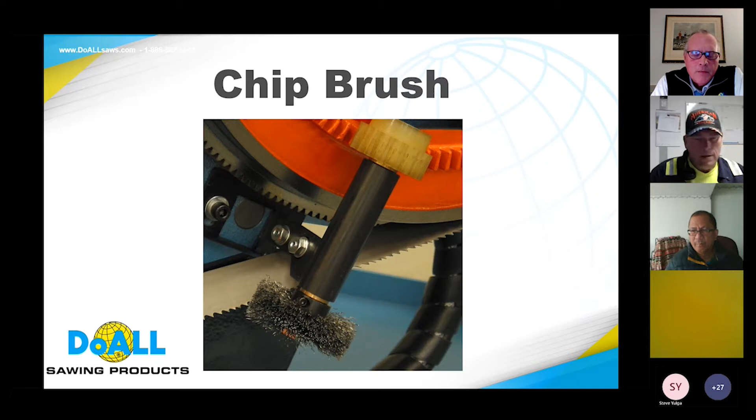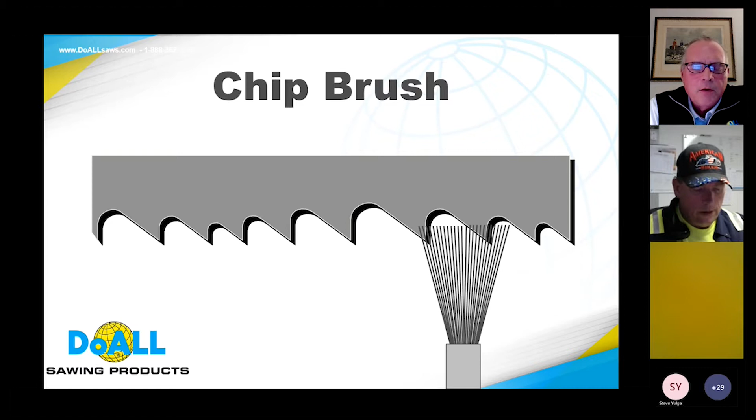The first item today we're going to talk about is the chip brush, one of the least expensive wear parts and also one of the most overlooked wear parts on a bandsaw machine, and it's very important in extending your blade life. The bristles of the wire brush clean out the gullets between the tooth tips. There are times when the blade travels through the material being cut and saw chips are left in the gullet, and you do not want those saw chips to travel back around and re-enter the cut. When that happens, the gullet can overfill, applying too much pressure, and something has to give - that is almost always your teeth stripping. So there's a correct way to position the chip brush: you want the bristles just barely touching the shallowest gullet. You don't want to jam the chip brush all the way into the blade, because essentially all you'll be doing is cutting the wire bristles of the brush. So again, a very important wear part, very important to extending your blade life.

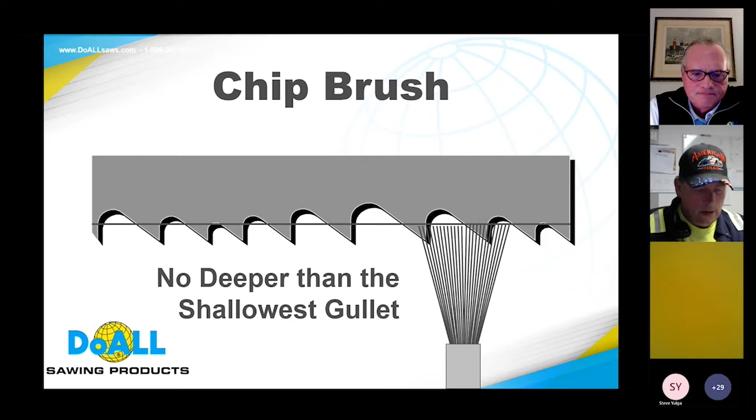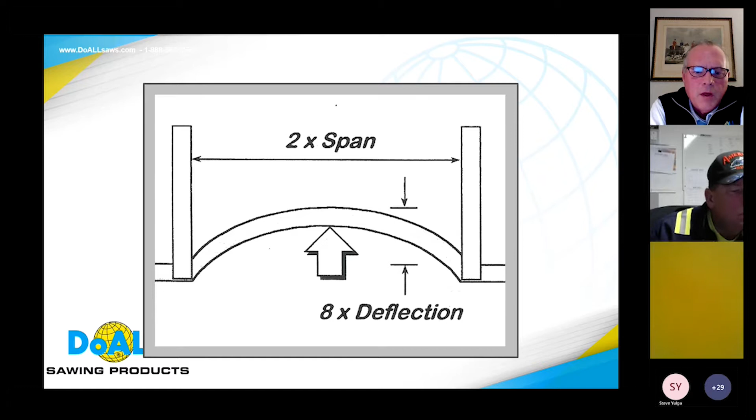So what is wrong with this picture right here? Well, the left saw guide arm is too far away from the material you're cutting. Your right saw guide arm is in the correct position. You want the left side saw guide arm as close to the material as possible, because when you don't position both of them correctly, your saw blade will actually deflect or bow upward. And when that happens, it causes stress cracks in the backing of the blade, extra fatigue, and then your blade will eventually break prematurely. This slide is obviously an exaggeration a little bit, but the numbers are correct: for every 2 times the span of the saw guide arm is too far from your material, the backing of your blade will actually deflect 8 times. So that is a great difference - great deflection - and as I said, when that happens you will develop cracks in the backing of the blade, and your blade will break prematurely. And as we all know, saw blades are not cheap.

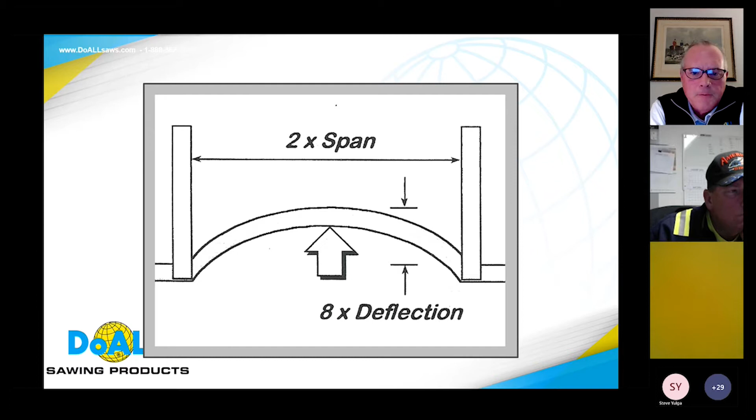We're going to talk a little bit about band tension. Every one of your saws, you put the new blade on and tension it, but most guys don't understand why they're tensioning the blade. Basically, different saw manufacturers have different specifications, but we're stretching that blade to eliminate deflection. When you get deflection, you start wearing the set on the teeth, and once the tooth set is gone, it'll start cutting crooked. So for band tension, if you don't have a tension gauge, you either have a service tech come in and check the blade tension, but it needs to be set to the manufacturer's specs of the saw, and they do vary among different manufacturers.

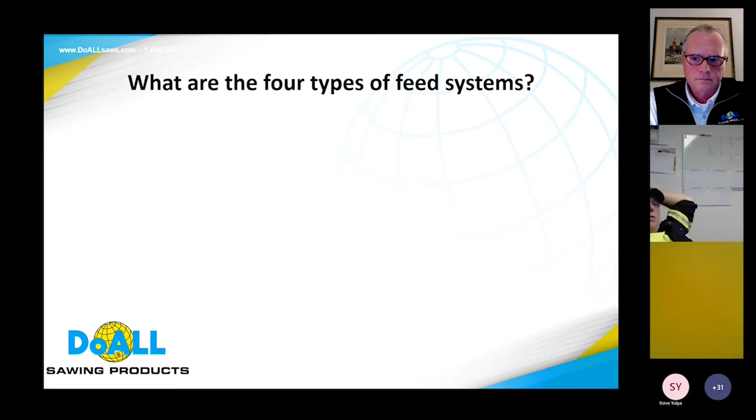Next thing we're going to talk about is the feed system. Feed system is how the saw is feeding through the material, and there are 4 types in general. The first one, found on your lower end saws, is what we call a closed loop hydraulic cylinder. Basically, all that's doing is bleeding oil from one side of the cylinder to the other, allowing the head to come down. It's controlled mostly with a flow valve.

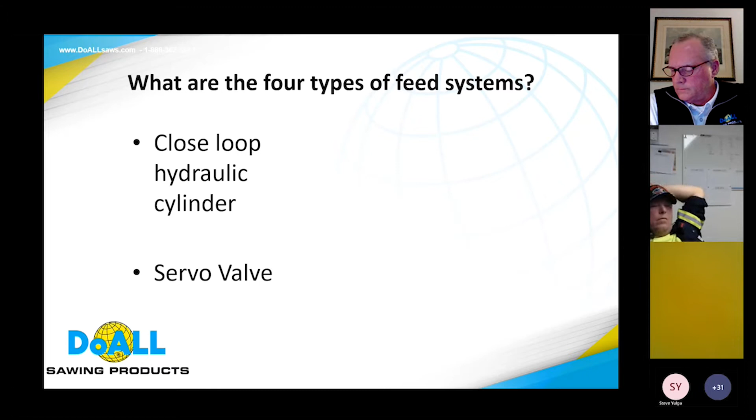The next type of feed system out there is a servo valve system. Servo valve systems are kind of getting outdated, but the back of the blade ran against the backup, which was connected to a valve. So when you were putting excess feed pressure on the blade at the tooth, it would slow the feed rate down. It's a very high maintenance item, and most saw manufacturers went away from this system.

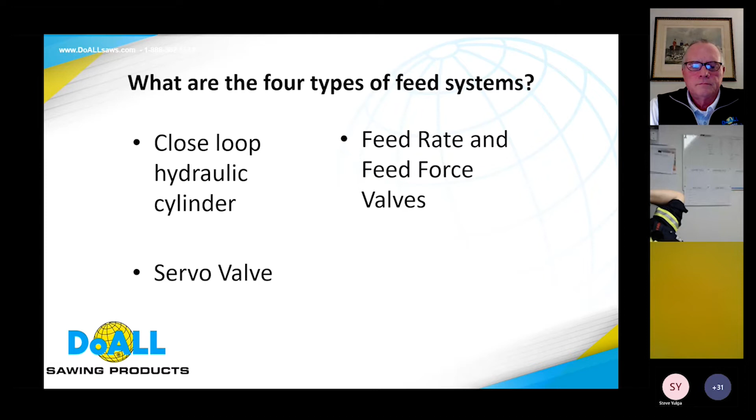Your next system, which is very common in your power saws, is feed rate and feed force valves. Basically, you're controlling your feed rate, and also the force, which is how much pressure you put on the tooth. You need to know which system you actually have so you're able to adjust them correctly to give you better blade life. Another name for that is a balancing valve.

The next type of system, more used in the newer, more advanced machines today, especially ball screw type saws—there are different modifications of this, but this is what we call a meter feed system. This is the feed system of the future. You will find this mostly on the higher end saws.

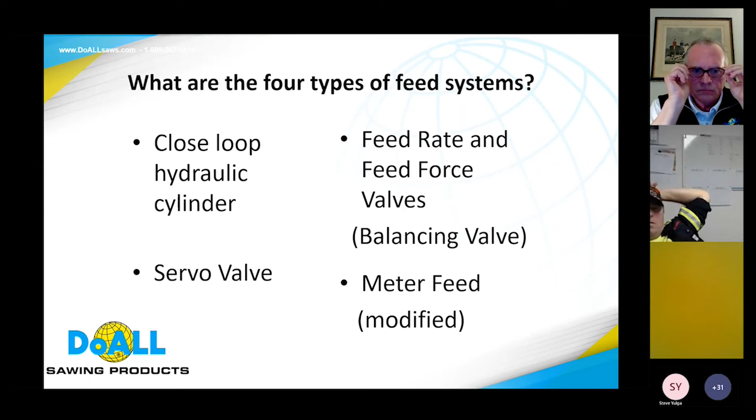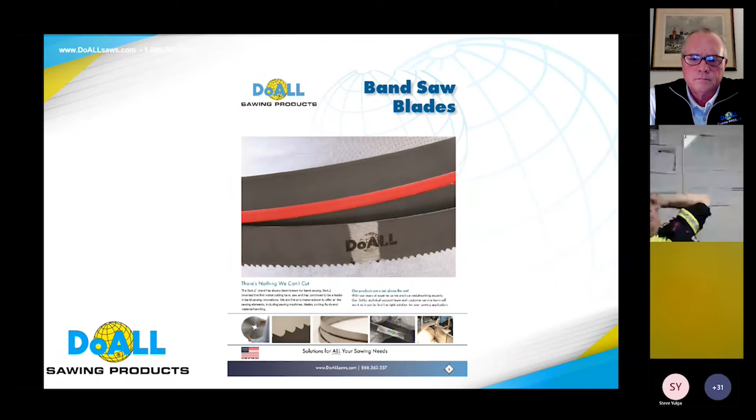So next thing is the blade sales catalog. Basically, this catalog has lots of information in it, and it would really be beneficial for you to have this catalog. If you don't have one, ask your sales rep to get you one, or they're available online at www.doallsaws.com. This has a lot of technical information—we spend a lot of time in the technical part of writing this catalog. So if you don't have one, I strongly suggest you get one.

Okay, here's one other important thing: breaking in your blade. What does breaking in the blade mean? Does it mean taking it and throwing it across the floor? Is that how you break it in? I see a lot of guys do that, but that's not what we're talking about. The main thing about breaking it in is it hones and strengthens the edge, and it will extend your tool life 25 to 50%. We have done testing on this time and again, and every time we break in a blade, you get much better blade life out of it.

You ask me, how do you break a blade in? Well, number one, you do not change the band speed—you leave the band speed alone. This is where a lot of guys make a mistake. If you change the band speed, you are still putting a heavy tooth load on that tooth. The next thing we want to do is reduce the cutting rate to half of the rate. So say you're calculating you want to cut at 10 square inches a minute—you now want to be breaking in at 5 square inches a minute, and you do that for 20 minutes. So take and cut half of your rate of what you were doing, and do this for 20 minutes.

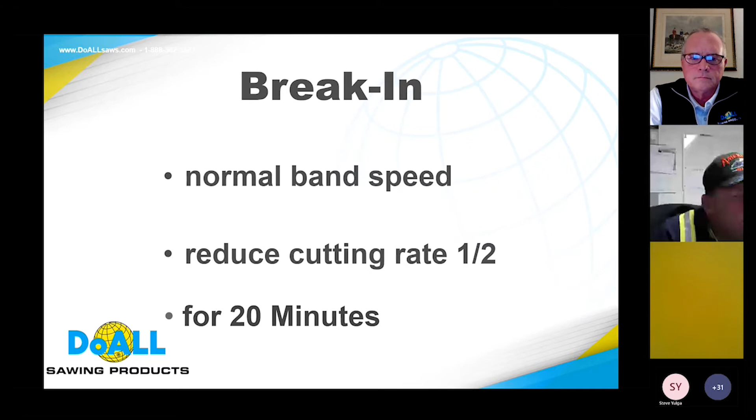Breaking blades in, we do differently for carbide. I'm talking about bimetal blades versus carbide blades—breaking in a carbide blade is done differently. The big difference with carbide blade is you now do decrease the blade speed, down to 70% of its value. So on bimetal, we did not decrease blade speed, but on carbide, you do, and you bring them up uniformly.

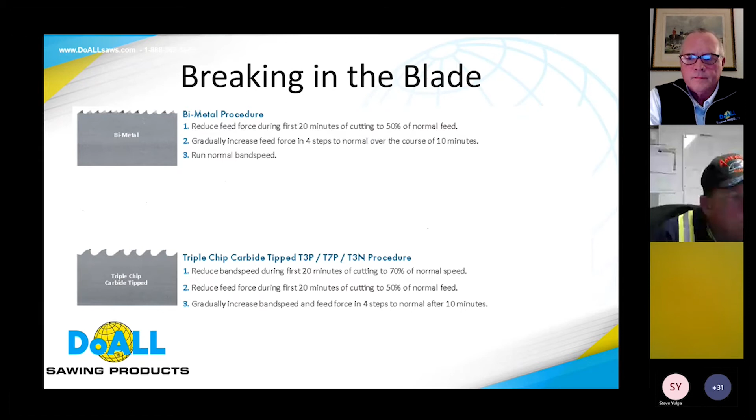So the easiest way to explain this is think of a lead pencil. If I took a lead pencil and sharpened it with a good point on it, and I go to write and push too hard, the point breaks. What do I do different? I don't push as hard—I hone that lead pencil in, and then I can start pushing and writing without breaking the tooth on it. Take it away, Art.

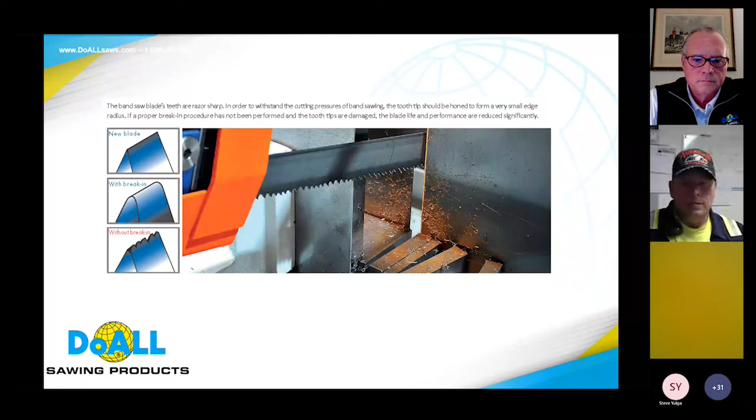Thanks, Dale. Appreciate that. So another very important technique of extending your blade life is making sure you select the correct tooth pitch per the material you're cutting. So how do you do that?

Well, as Dale explained, our catalog has a wealth of information, and one chart in the back of our blade guide helps you select the correct tooth pitch. So for this example, if you're cutting a 6-inch round piece of material, look straight across the row up top until you get to 6 inches. Then look straight down the column. You can see there that your primary number one blade tooth pitch choice is 2-3, meaning 2 to 3 teeth per inch.

But if you have a 3-4 pitch, that's also fine. That is our secondary choice. So primary choice for a 6-inch round is 2-3, your secondary choice is a 3-4. Both of them would work fine. Make sure you select the correct tooth pitch.

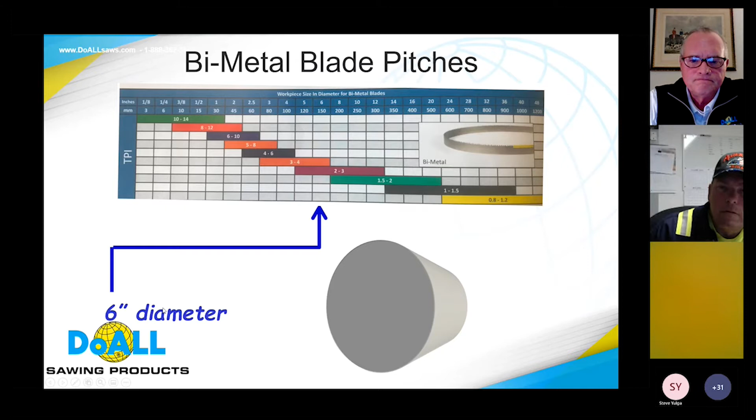All right, so you always want to make sure that you have a minimum of 3 teeth engaged and a maximum of 25 teeth engaged in the material. Why is that? Well, you need a minimum of 3 teeth engaged because your saw head is a lot of weight, and if you only have 1 or 2 teeth engaged with the weight of the saw head coming down, you're going to snap the teeth, you're going to break the teeth off. So have a minimum of 3 teeth.

And why do we say a maximum of 25? Well, if you have too many teeth going through the material you're cutting, your gullets will overfill. And when your gullets overfill, there's a lot of pressure. What's going to happen? With that pressure, something's going to have to give, and you'll start stripping the teeth.

So when you're cutting thinner sections or thin metal, you want to choose a finer tooth pitch, more teeth per inch. When you're cutting thicker sections or thick metal, you want to choose coarser pitches, or less teeth per inch. Very important in extending your blade life.

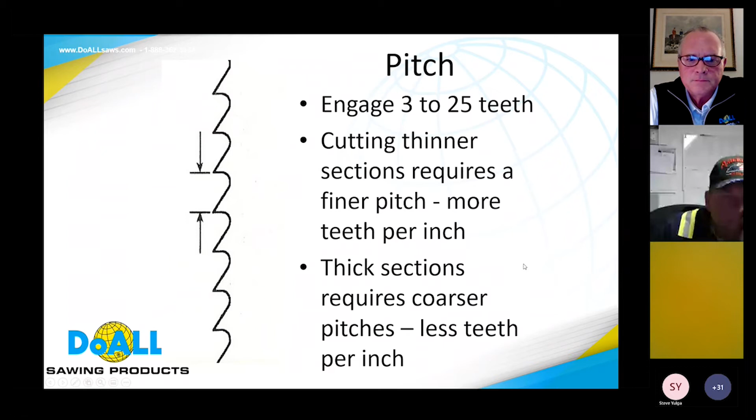So it was real easy choosing the tooth pitch for a 6-inch round solid. It was basically one step involved. What about if you're cutting structural type of material like your channel, your angle, I-beam, or tubing? Well, it's still very easy.

It's a 2-step process. First, you want to determine how wide your structural material is, represented in this example by letter B. Then you want to determine the thickness of the leg of the angle, or the wall thickness of the tubing, represented by letter S. Once you determine letter B, you look across the chart to find how wide it is, then go down the column of letter S, and connect the dots between the column and the row, and that will tell you exactly what tooth pitch you should choose for that type of structural material.

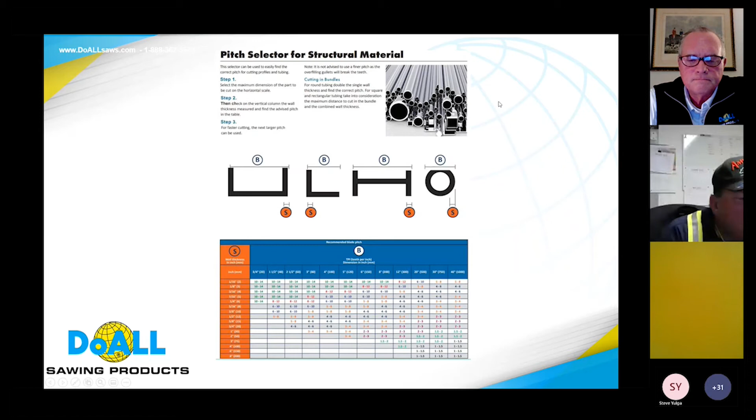Okay, go ahead and advance it. Thank you there, Art. We're going to look right now at figuring out cutting rates. A lot of customers or operators run their saw by what someone told them, but there is some math that has to be done, and we need to know this.

So basically, you will find sawing recommendations. We have charts. Somebody may have the old slide rule that's still available. You can find it on our app that gives you cutting rates. There's many different ways of finding them. But you need to know basically, one, what your band speed should be, and two, how many inches per minute we're going to be cutting, getting our cut rate off the chart.

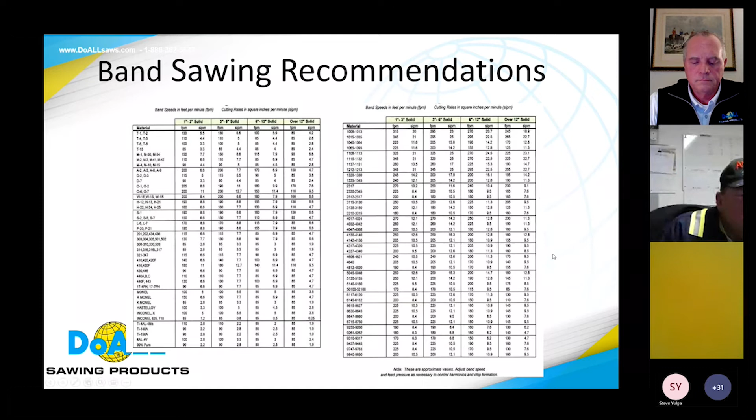So here's the formula. What we're trying to do is find time. It's A-R-T: Area equals Rate times Time. We know the cutting area, that's the material, whatever we're using—a round, a rectangular, or a square. We can figure the square inches of our material. The cut rate we get off the chart, that gives us our cut rate.

And then cut time is how long it takes to cut that piece of material. That's the ultimate goal. If you're not cutting at the proper speed, you're losing production, your cost per cut goes up. If you're cutting too slow, you're sitting there just honing that blade, rubbing that blade, and killing your blade life. So it's important to get a good cut time. Too fast or too slow, both will deteriorate and kill your blade life.

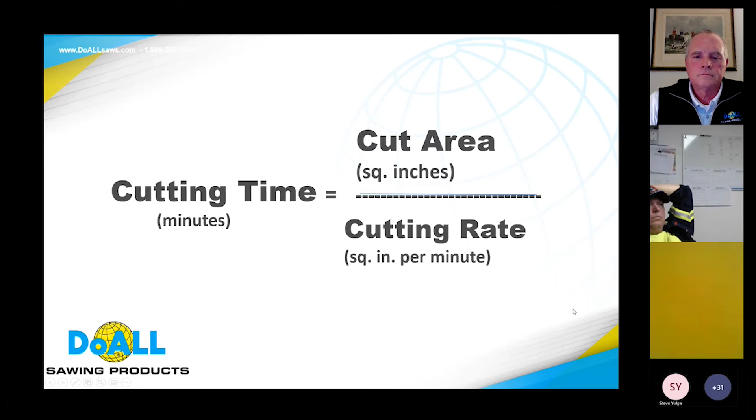So this is the formula, I'm asking you to write it down and start using it. The next thing you need to know is your headfall. A lot of your saws today are working with headfall now.

Basically what they do is they're saying, okay, my head's got to drop 3 inches a minute, or my head's got to drop 2 inches. And there's actually scales on the newer saws of today. So to figure that, here's the formula: you take your material height, divide it by the cut time, which you got from the other formula, and that will give you your head fall. So you can know exactly how fast that head is falling through material. These are two formulas that you really need to know and practice in cutting. We'll gladly work with you to help you get these proper calculations.

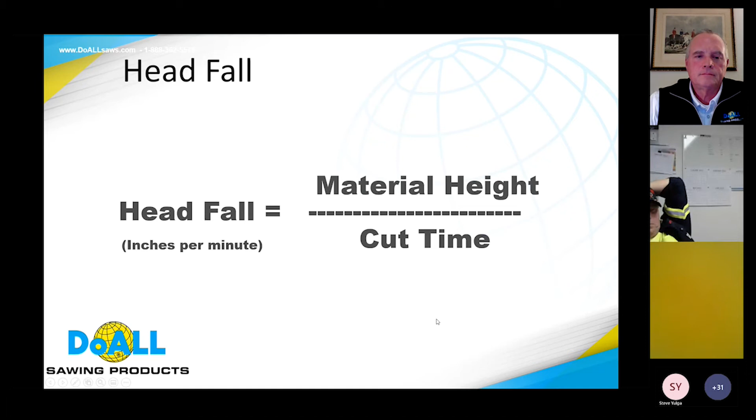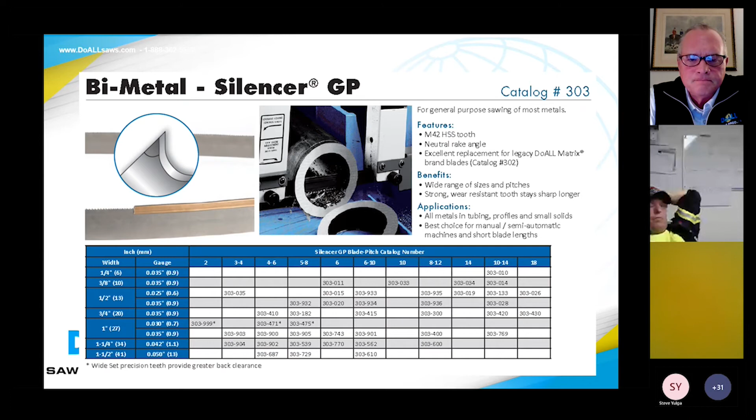So our second blade I want to talk about is our Silencer Plus. Again, it's a good all-purpose blade, used mostly in your solid type of materials. The finest tooth pitch the Silencer Plus comes in is a 6. So if you need a finer tooth pitch, like I just mentioned, you want to go with the Silencer GP. The Silencer Plus is a more aggressive blade, has a positive rake angle, so the angle of the tooth tip is greater. It pulls a bigger chip, and it's a little faster cutting and more aggressive.

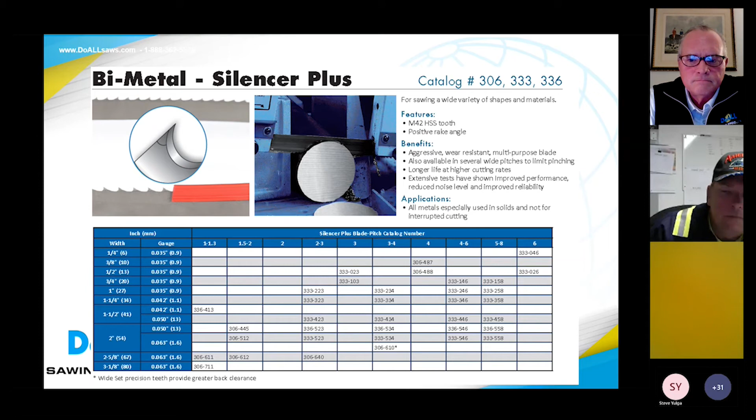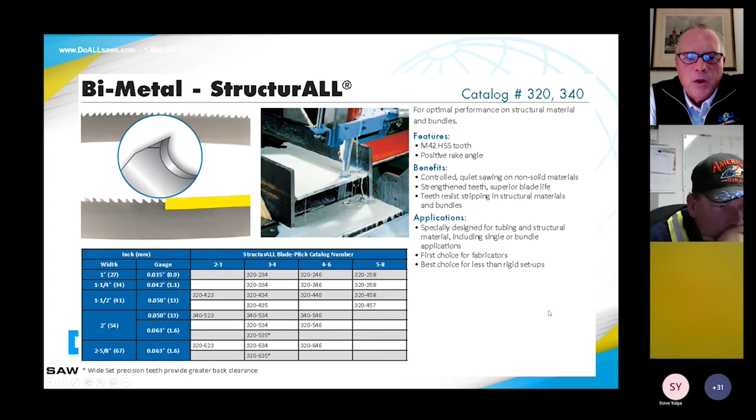The third one, the StructurALL blade, is designed to cut exactly as the name implies - structural type of material. So if you're cutting I-beams, angle, channel, this is your go-to blade for structural material. What makes this one a little different is, as you can see in the circle right under the word metal, we left more metal on the backside of each tooth, which makes each tooth more robust and stronger, preventing tooth breakage. It has a positive rake angle like the Silencer Plus, so it really pulls a good chip. It's more aggressive and a little faster cutting as well. But this is the blade for your structural type of material.

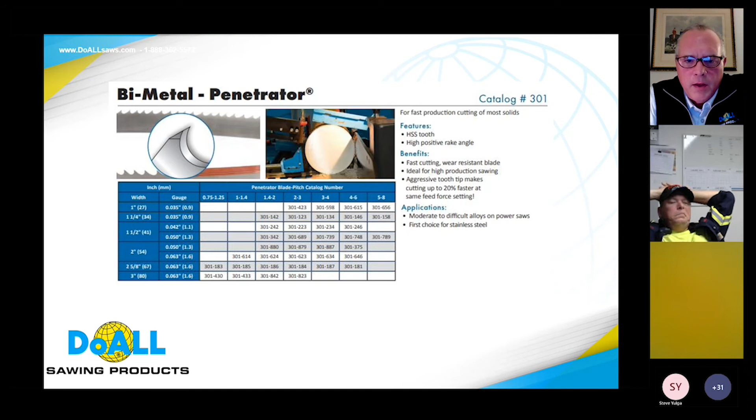And your fourth blade is our Bi-Metal Penetrator blade. This is your number one go-to blade when cutting solid material. It has an even greater rake angle than the Silencer Plus or the Structural. It's very, very fast cutting, pulls a very nice big chip through the material. It does exactly what it says - it penetrates the material, very fast cutting. So these 4 are your most popular bimetal saw blades that we offer. Thanks, Tim.

Okay, so we did a real brief little covering, most we could do in our time limit. We covered a little bit about machines, and a little bit about blades. Now the third element of bandsawing is coolant. Coolant is very, very important. A lot of people think the cooling is to cool the blade during cutting. Yes and no, but in bandsawing we're looking more for lubricity than for cooling properties.

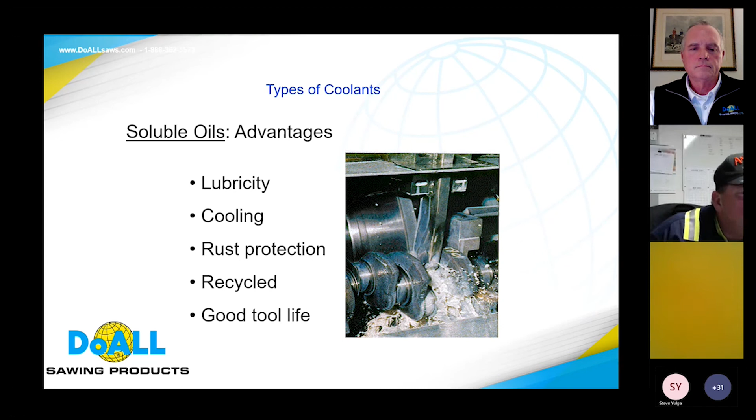So there's four basic types of coolants. We'll start with straight oils, but nobody uses straight oils anymore - most saws can't even pump straight oils. Our next starting coolant is a soluble oil. Soluble oil is a coolant that's mostly oil and water. It gives you some of the best blade life, best finishes. The downfall is it doesn't have a really great sump life. So if you're doing some hard cutting, look at soluble oils.

Your next type is a semi-synthetic. A semi-synthetic is going to have less oil than what is in a soluble oil. This can be anywhere from 5% to 25, even 30% oil. But the nice thing about synthetics is the sump life is a lot more friendly, and the parts are cleaner.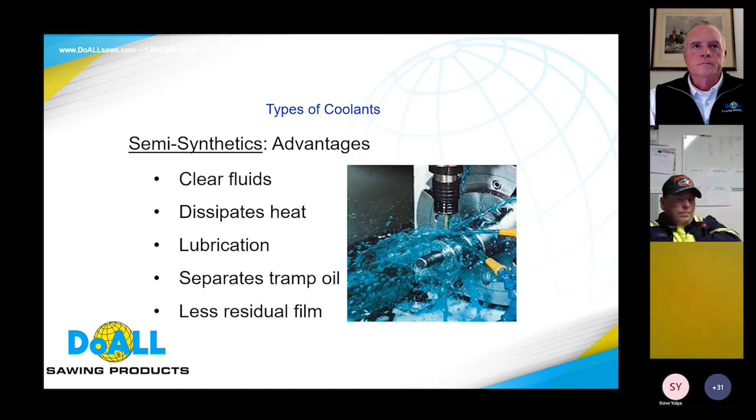This is kind of becoming the preferred type of coolant for most operators.

The next type of coolant out there is your synthetics. A synthetic has no oil in it, and oil creates bacteria that loves to thrive in oils. So your sump life is much stronger, longer lasting in a synthetic. The other big advantage of a synthetic is looking at your next operation down the line. If you're going from cutting to painting, synthetics may be a way to look at because you don't have that oil base to clean up off of the part. So your blade life is not as good as in the other ones, but this is a good alternative.

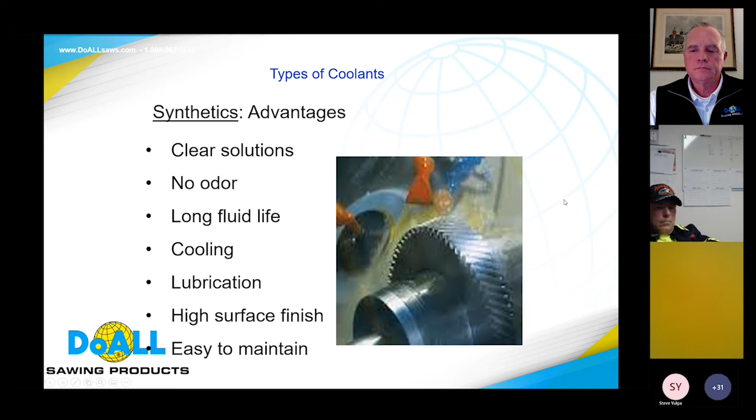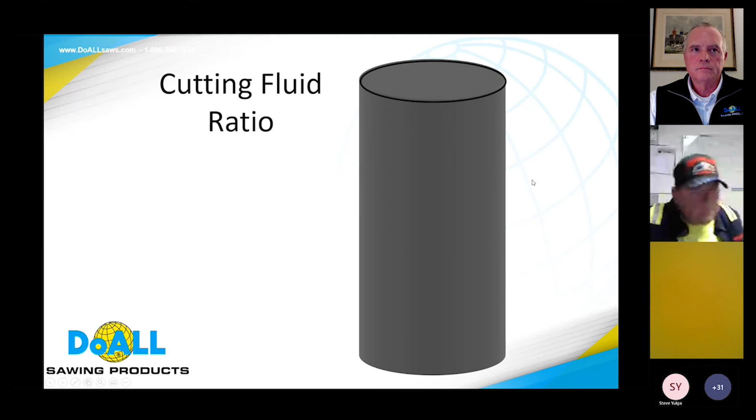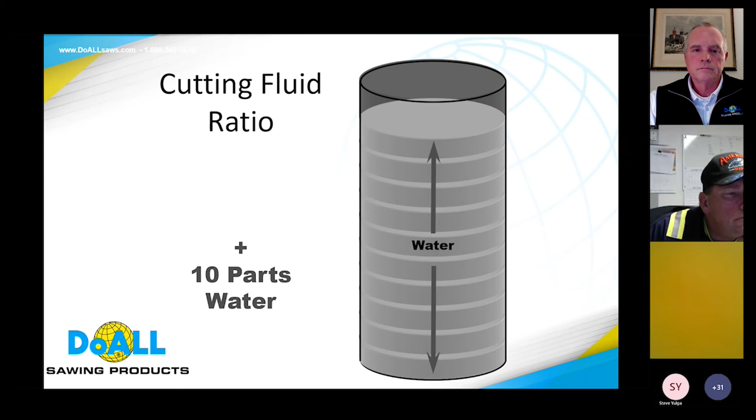So those are your three types of basic coolants used in the market. The biggest thing is we look at how to mix coolants. What's the ratio? Again, we're looking for lubricity properties. In machining, you're mostly looking for cooling properties. So basically, what we do is we take 10 parts of water to 1 part of concentration. That is how you mix. I don't care if it's a soluble, a semi, or a synthetic. They're all mixing the same ratio: 10 parts of water to 1 part of concentration.

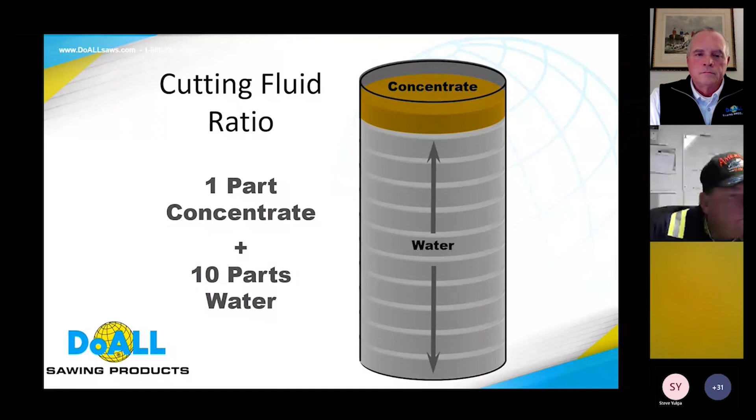Okay, how do you mix correctly? There could be a situation where some of you might have a proportional meter that mixes it, which is a very good way of doing it. But if you're still mixing it in a can, first thing you want to do is get yourself a can and get some fresh water with a clean can. After that, your next thing is to pour your concentration into the water. Don't be like a lot of people, putting some concentration in the bucket and then using the garden hose to mix it. That does not work. You will get separation from the molecules that will wrap around. So always take and put concentration in the water.

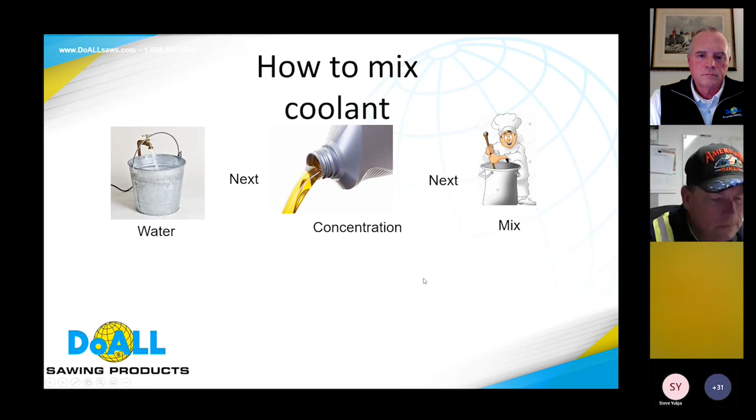Once you've done that, mix that coolant up, get it ready to dump in the sump. And we always say, what does OIL stand for? Oil In Last. If you remember that, you won't go mixing it the opposite way.

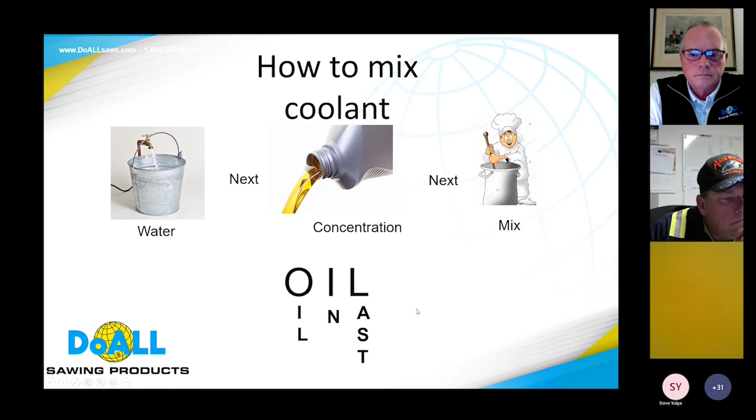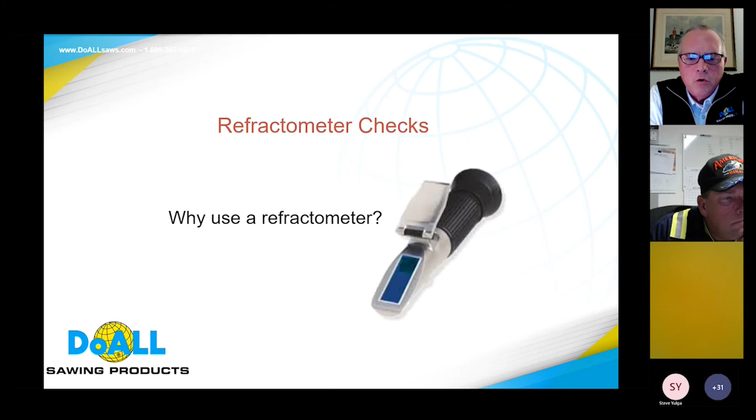Thanks, Tim. As Phil mentioned, these are really nice coolants to use, but if not mixed properly, they're just not doing their job. And how do you know if they're mixed properly or not? It's by using a refractometer. And why do you use a refractometer? You want to make sure that the water and coolant ratio is mixed correctly.

Then you've got some issues going on where foreign types of oils, tramp oils, have gotten into your sump. It may be just over time. It's just time to clean out your sump pump completely and recharge it with brand new coolant and water. So by checking your coolant with a refractometer, that will definitely extend your blade life if it's mixed correctly and if it's maintained correctly.